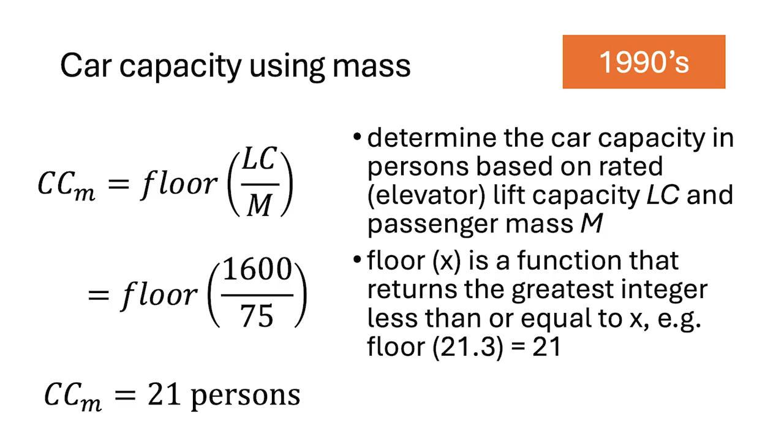And when I started, I put the 1990s, actually it was the 1980s, working on simulation and calculation, what we did, and this was when I was at Arup actually, was divide the lift capacity, 1,600 kilograms, by 75 kilograms per person, and we get a 21-person car. And that's basically how I decided how many people you got in a car.

And most of the people will know Gina. If you don't know Gina, talk to me about Gina afterwards. She was sort of the grandparent of traffic analysis in the modern world. And she told me, "You're wrong, Richard." In her inimitable style: you cannot get 21 people in a 21-person car. And of course she's right. And this is what I looked like back then. Yes, Dr. Barney. But I have an 80% factor.

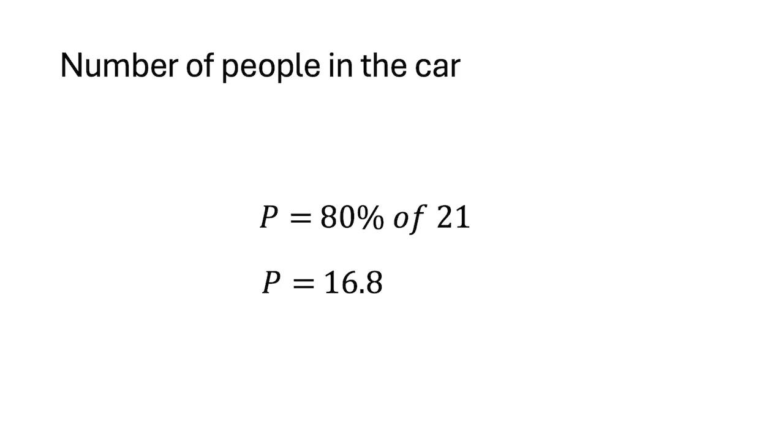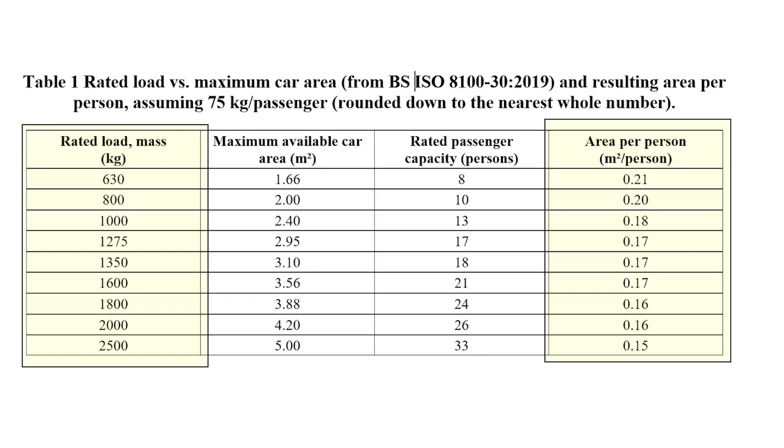Here's the 80%. What I do is I say 80% of 21 is 16.8. So I only think you get 16.8, and that's my excuse for it not actually fitting in. So that was my understanding at the time. And then she said, "You're still wrong, Richard." She said, well, actually what happens is as the car gets larger, you have less platform area per person. Are people aware of that? Yes. So at the 630 kilogram, that's fine, no problem.

But when you get to the really large cars, you've got much less area per person if you're calculating based on kilograms. So the whole thing goes wrong. And I really tried to wiggle out of it and say, oh, we can adjust the capacity factor as we get bigger cars. But no, she was right, I'm afraid. And so that's when I started adapting my calculations to fall in line with Gina. We've still got the mass over there, but we also have got the area.

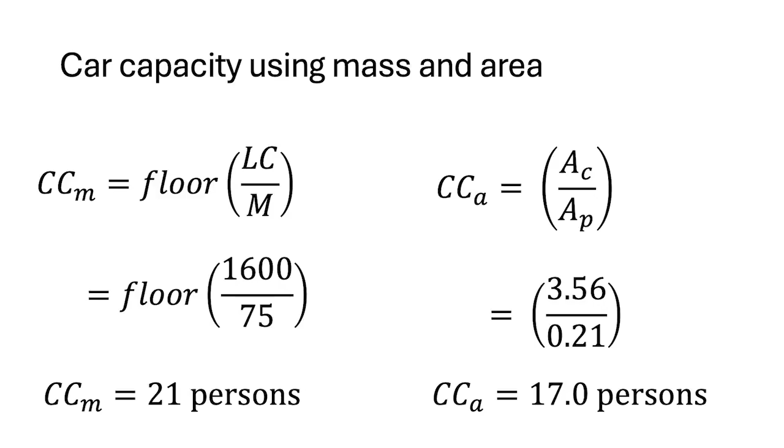So the area of the car, that's 3.56 divided by 0.21, 21 persons down to 17 persons, so it's not so big. And of course, then I'm still applying my 80%. What's that 80% for now? It's not about derating, it's something else, isn't it? But therefore, we get down to 13.6 persons. So my calculations were assuming 16.8 persons. Now they're only assuming 13.6 persons, which is a bit embarrassing, really, isn't it?

But anyway, that made Gina feel much better, that I agreed with her. She felt I was taught. And this is a slide from yesterday when we were talking about the development of Guide D. So Gina started the traffic section in Guide D in 1993. And if you were here yesterday, you would have heard me say this.

Peter Day, who was in charge of it, asked me to improve Gina's section, and that wasn't received very well. Improve Dr. Gina Barney's work, and that's when we were in angry face mode. And as the years have gone by, and these are every 5 years, apart from when she was angry, we've updated Guide D, and we sort of merged together. Sometimes she was right, sometimes I was right, and she quietly accepted it without acknowledging it. But anyway,

we do our best. And I thought, if I die tomorrow, you can put this on my gravestone if you like. An engineer is guided by principle, but corrected by truth. I think engineers, that's what we do. We're not like politicians. We don't try and hold on to lies. When we learn something, we should change.

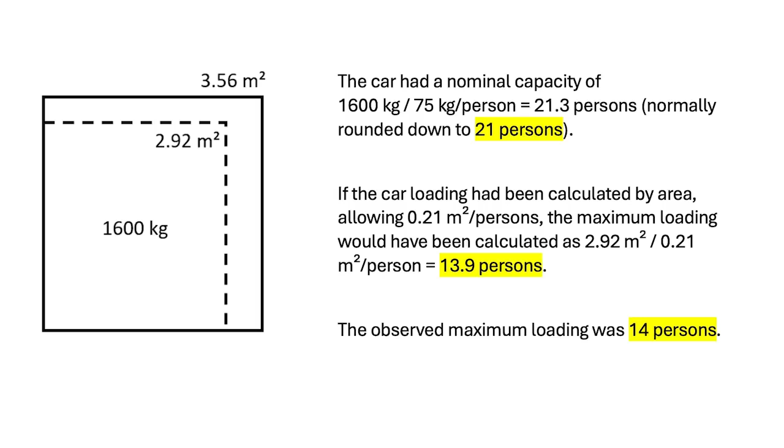We can have a 1,600 kilogram lift, but it might not have room for that 3.56 square meters because the shaft is smaller. And on this one job it was a 1,600 kilogram elevator and it had 2.92 square meters platform area. So it's considerably smaller. And according to the plate on the elevator, 21 persons could get in it. When I did my calculation, I reckoned it could get 13.9, and I observed a maximum of 14 when I was doing a traffic survey. So we can make some big mistakes if we're not careful with this. So it's worth getting it right.

So having assessed that we need to work out lift capacity by area, what's the 80% for? There must be some other reason for having 80%. We actually have to look at other industries and other statistical experts. So this is the easiest example I've found. This is network capacity. When they're planning for telephones or networks, they limit it to about 80% to avoid getting near overload and outages and saturation. Yeah, so that 80% is about not getting too close to the threshold where the whole thing falls over.

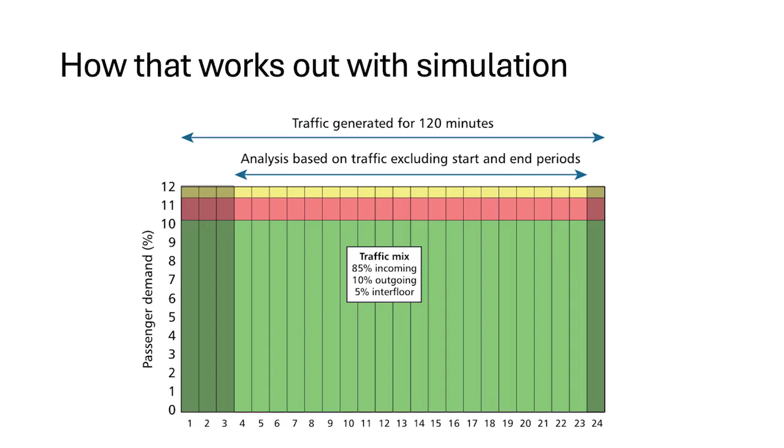And to demonstrate that, we can do some simulations. So I've got the ISO template here, which is a 2-hour template, 5 minutes, and I've got a mixed traffic flow running there. And I've done a number of simulations at 11.5% passenger demand, 12% passenger demand, 12.5 and 13. ISO normally just does one simulation, but I've done 10 simulations.

And if we look at them individually, this first simulation, at demand of 11.5%, I've got an average waiting time of 26 seconds. 12%, I've got 32 seconds. And then at 12.5%, it's 39, and then 71 at 13% demand. So as the demand increases, the average waiting time goes higher.

This is my second run, so it's completely separate, different random number seeds when you run the simulation, and you get a different set of results. So I've got 26, 30, 59, and then 151. So that 13% one's gone up quite a lot, hasn't it? Yeah. And then this is the next one. And then this next one.

And this one, the 13% is going all the way up to 212 seconds. So the higher values are much less stable, aren't they? As the demand goes up, it becomes less stable. And that's to do with the loading.

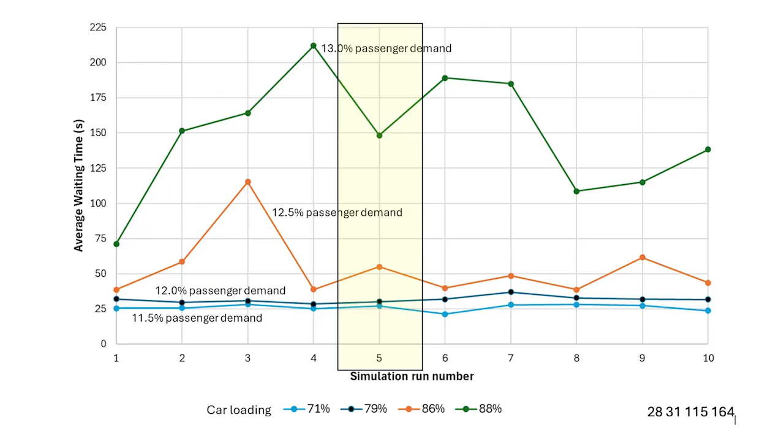And I ought to acknowledge Janne here, because he actually, Janne Sorsa, suggested we should look at these with standard deviation because it's a good analytical tool. Basically, it's a measure of the variation of a set of values. And for simulation, we can see how much the results fluctuate over a series of runs. And that's what we're doing here.

A low standard deviation suggests that we're nice and stable, and a high standard deviation suggests the results are unstable and not reliable. If you do that to the results I've got here, I've plotted it by car load area. At 71% car load area, over the 10 simulations, the standard deviation is 2.2. At 79, I've still got a standard deviation of 2.3.

As soon as I get it to 86%, so with the extra 0.5% demand, I'm getting up to a standard deviation of 23.3, and then it goes up to 42.2. So the whole thing becomes completely unstable. So my results for my 13% demand are actually just unreliable, because they vary so much, they're so dependent on the exact generation of the passengers in the simulation.

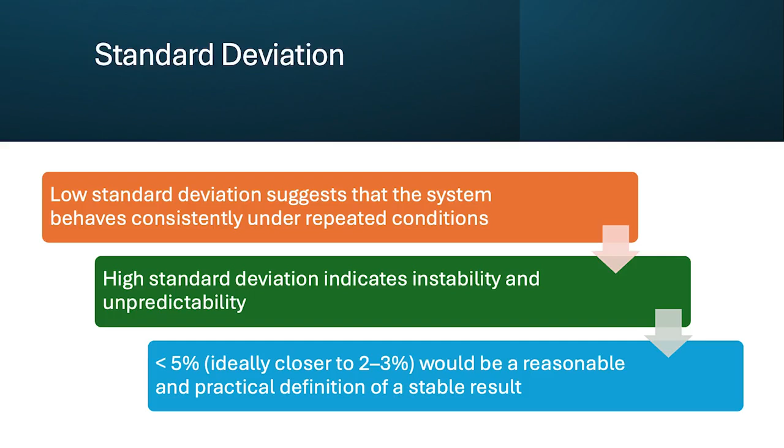So ideally we'd have a low standard deviation, about 2 to 3%, less than 5%. And this is a figure I think we might end up using within simulation software to say, okay, we'll simulate until we get to that level, or we reject it on the basis that the standard deviation between the runs is too much. It's a nice little measure to see if the simulation is stable and worth doing.

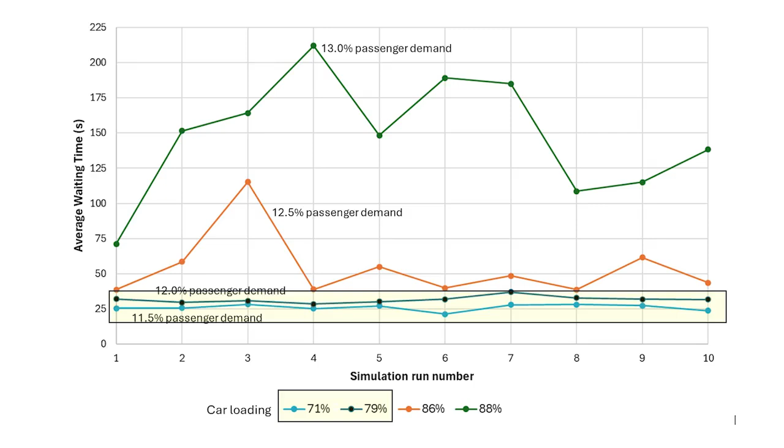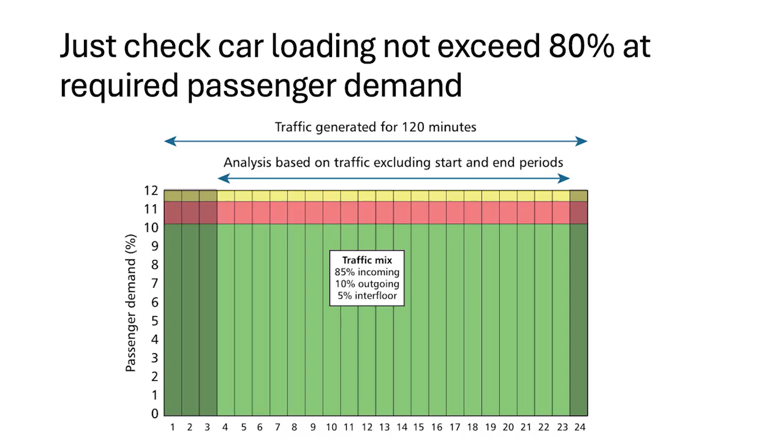And here you can see the lower two lines are at 71 and 79% loading, and the top two lines are at 86 and 88. So that's what's causing the unreliable results. So my suggestion, if you're going to do these sort of simulations, and I have mentioned this in Guide D Section 4, you actually don't need to do all these multiple simulations.

You just need to do one simulation at the demand that you're looking for, and then look at what the loading is. Then you know that's stable, and you also know if you're above 80, you're basically on the verge of falling over. If you're at 50 or 60, then you've got lots of spare capacity. So I would like to flip it round when we come to revise ISO 8100-32, and we'll start thinking about it soon. So that's my proposal for that.

This is actually what we do within the CIBSE templates. And CIBSE templates are a slightly different approach in Guide D. We're dealing with a transient, so we're going up to the peak of 12% and coming back down again. But what we're doing is looking at the loading at that peak. And you can see here that it doesn't exceed 80%, so that's why I'm happy.

Application. There's been an FAQ on our website on how to do loading for years, but I wanted to focus in on it, and I've spent more time in Guide D explaining it. When we're doing a calculation in a popular software program, we want to specify the capacity factor as 80%. So when you're doing a calculation, you have an input of 80%.

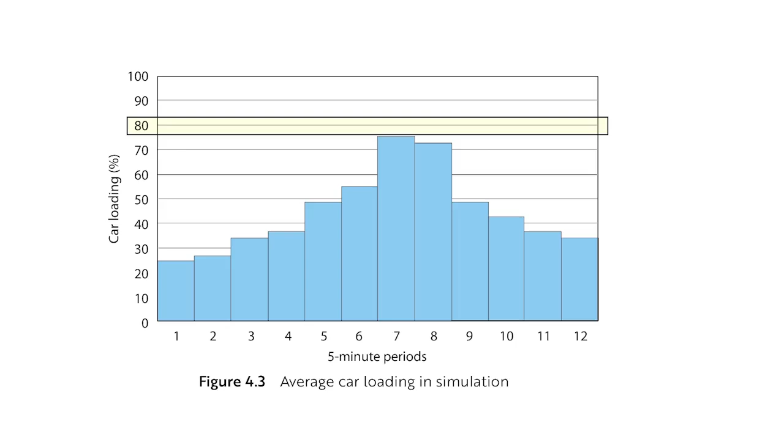When you're doing a simulation, you have an input of 100%, and then you look at the results and check they don't exceed 80%. It's a bit subtle, which is why it needed more than an FAQ. So there's a whole paper on it now on why I would take those inputs and look at those results.

So to conclude, Gina was right most of the time. Not always, but most of the time she was right. I violently agree with Gina on car loading. This is the way to go, and anyone who disagrees with me, I shall argue as vehemently as Gina on that. It's the way to go.

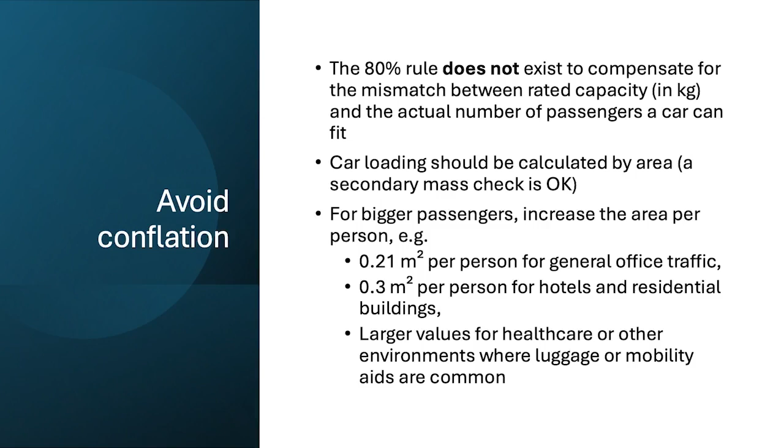The 80% rule is not about the mismatch between rated capacity and the number of people you get in the car. So we need to use area to decide how many people you can get in a car. A secondary check with mass is fine. For the smaller car sizes, that might actually be the pinch point, but almost inevitably it's the area.

If you've got bigger passengers, historically what people would do if they were doing hotels or hospitals is reduce the capacity factor, so you take that 80% down to 40% or 50%, but that's conflating the wrong things. That's not actually the right way to do it. All we do is increase the area per person, and then you can solve it that way.

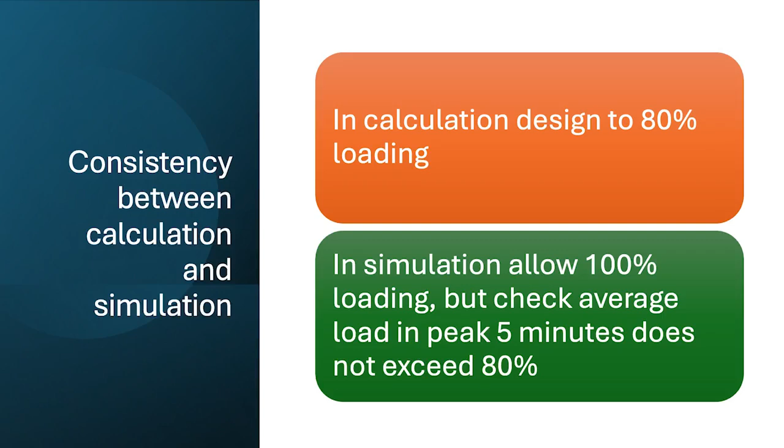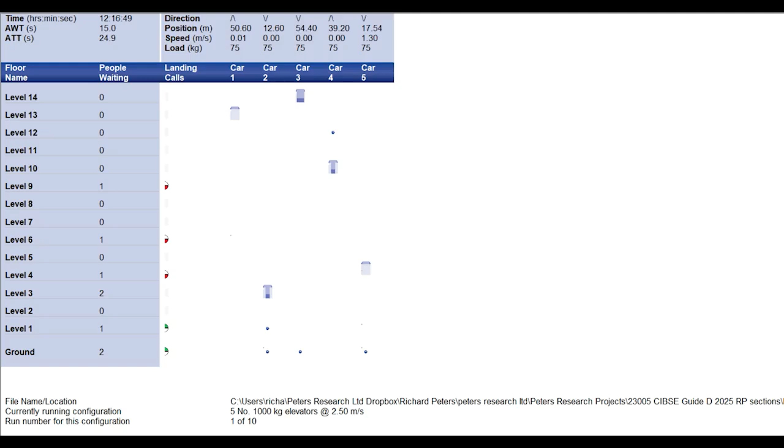So in calculation, design to 80% loading. In simulation, allow 100% loading, but check that your average loading at the peak doesn't exceed 80%, and then we're happy. And if you run a simulation and the loading exceeds 80%, then your results are unlikely to be stable. And I get lots of emails: why have I got such high average waiting times, and why does it vary so much between the runs? And that's the reason, because the loading is high.

Final thought, and this hit me the other day, because I'm becoming increasingly aware that the work that we do in traffic analysis is going to be related to evacuation. At the moment, the work that we do is to do with how long people wait, how inconvenienced they are and how annoyed they get because it takes a long time to get to their destination. Now we're going to be dealing with how quickly we can get people out of the building in an emergency situation. So it's actually become a lot more serious. When we start doing evacuation calculations, being realistic about the loading you can get in the car is really important. So that's why I think this is the time to say that's the way we're going to do it. That's it.

Do we have any questions? Adam? Well, I guess there might be two observations rather than questions, Richard, but always your opinion I seek, always. Adam is currently on the ISO committee, so you're going to be backing me up on this.

But the first one, I think, is this 0.21 that we use, and its relationship to an elliptical form. And yet we're trying to fit elliptical forms into rectilinear lift cars. We can say 3.56 square meters, ISO standard, 1,600 kilogram car, divide by 0.21, it's 16. You won't fit 16 elliptical shapes in that rectilinear car.